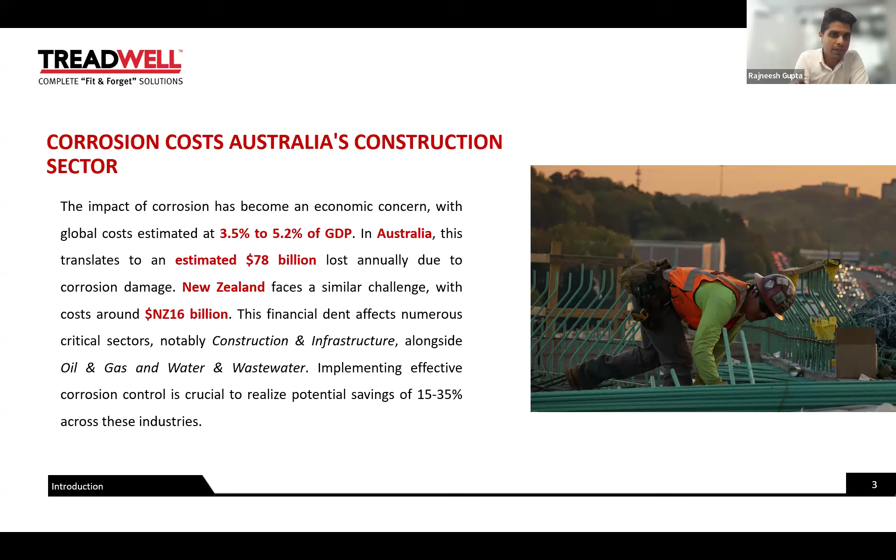Perhaps to give you a short introduction on how FRP rebars are made. They are made through a process called pultrusion. And in terms of the raw material, there are two typical raw materials, which is the reinforcement in form of glass rovings, which are helically wound, and the matrix is either an epoxy or a vinyl ester resin. These are helically wound and are impregnated into the resin of choice, depending on the application, and perhaps are heated to a curing temperature, after which they can be cut to length. This process is continuous and hence is suited for voluminous runs.

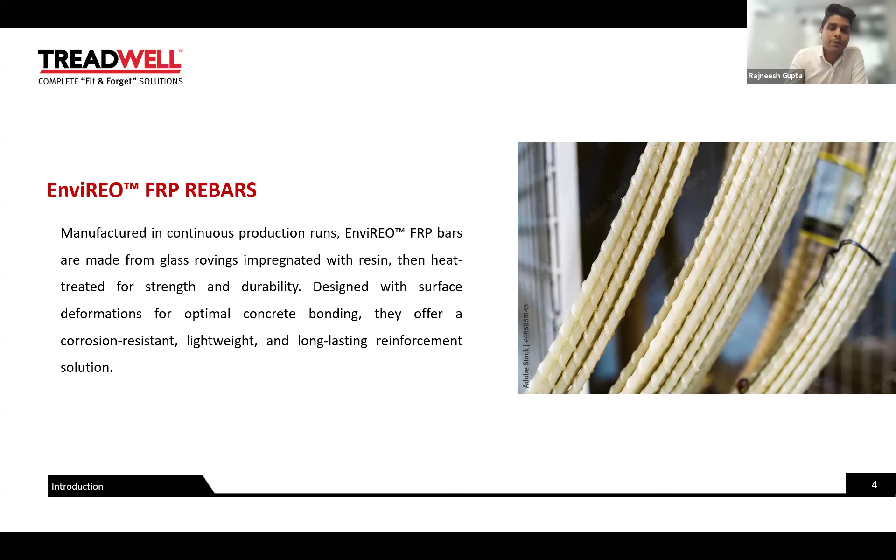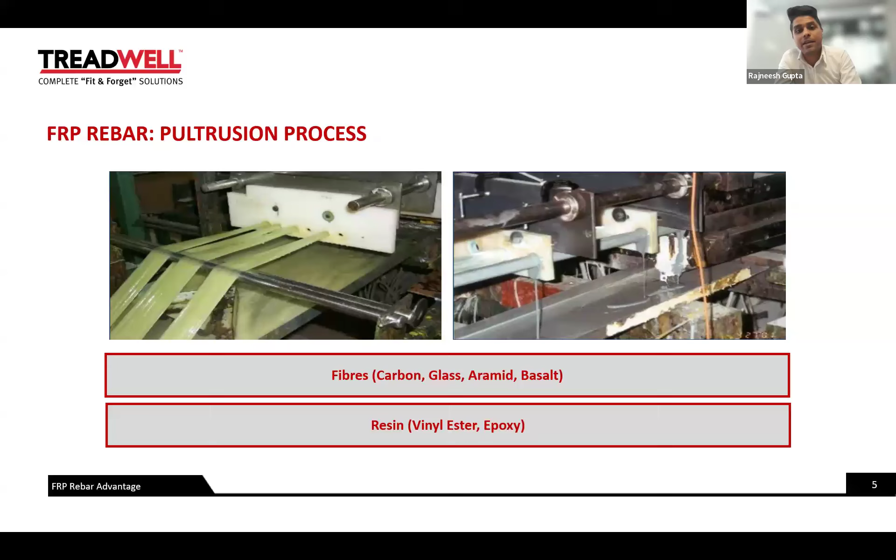And just to give you an update on different types of reinforcement that are possible through this process, we can use glass, we can use carbon, we can use aramid and basalt. And so are the resin choices, which are vinyl ester and epoxy. In specific to us currently, where we stand, we are only offering glass as the reinforcement, and most of our products are based using epoxy resins.

Now, some benefits of rebars: similar to other FRP products, they are non-corrosive, perhaps solve for harsher chemical environments where the conventional material have a lower design life and have to be cared for in terms of refurbishment costs. Perhaps have a longer design life, which is over 80 years. They have greater tensile strength, almost 3 times than the conventional steel, which is of the tune of 1000 MPa compared to 420 MPa for steel.

Nowadays, as we see with the global trends that we are becoming more and more sustainability conscious, perhaps both upstream and downstream, producing glass fiber reinforced rebars is less energy consuming. Hence, the carbon footprint is an estimated 35 to 45% less compared to the conventional choices of rebars that we have currently in steel.

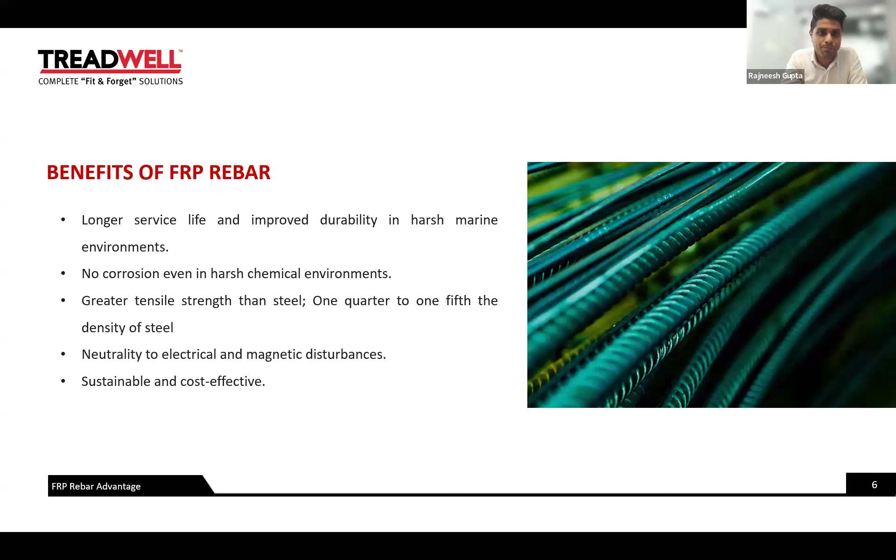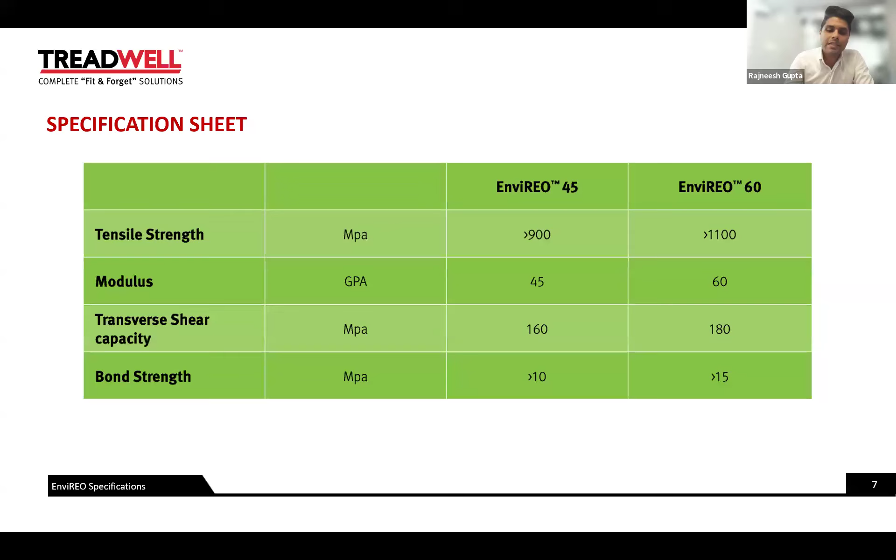In terms of a product offering of rebars, we are having two different variants of rebars. One is the base offering, which has a modulus of elasticity of 45 GPa and over. These rebars are used mainly for non-structural purposes. However, there is a premium offering which has a larger modulus, which is 60 GPa and over. These can be used for structural and load-bearing purposes.

A little more in terms of the advantages: as we were discussing earlier, the design life estimated by using these products is 80 to 100 years. Significantly low energy consumption, both upstream and downstream. There is no thermal bridging that is required. Because of the lightweight nature, the carbon footprint is lower in terms of logistics as well.

In some cases, depending on the application, one can also save the concrete cover, because since it does not corrode, we can avoid accounting for larger crack propagation by having reduction in the concrete. But again, there are certain variables to be considered. There are cases where off the shelf, if one is comparing the material price itself, there are certain sizes where FRP might tend to be slightly expensive compared to the conventional material.

However, when one compares the end-to-end cost, which is cost of the material, installation cost, logistic cost, it has been seen that overall project cost gives one a 25% to 30% saving in most of the cases.

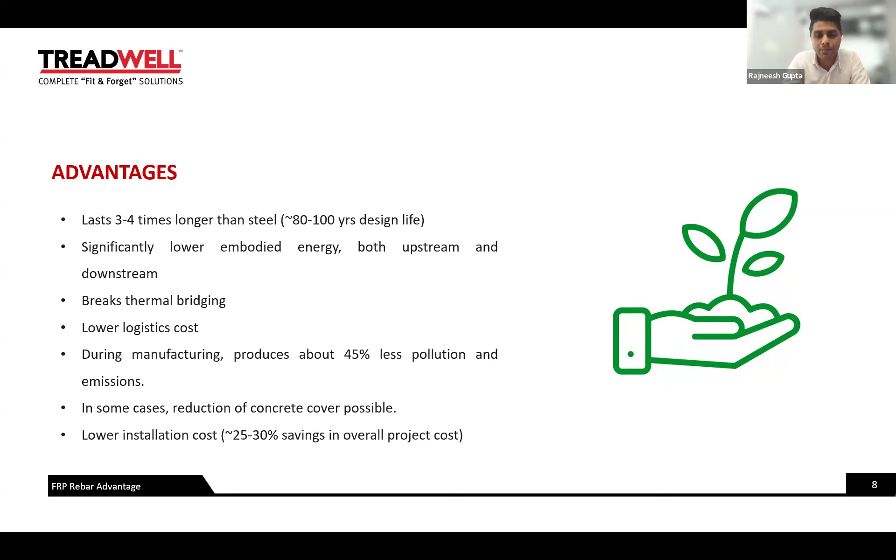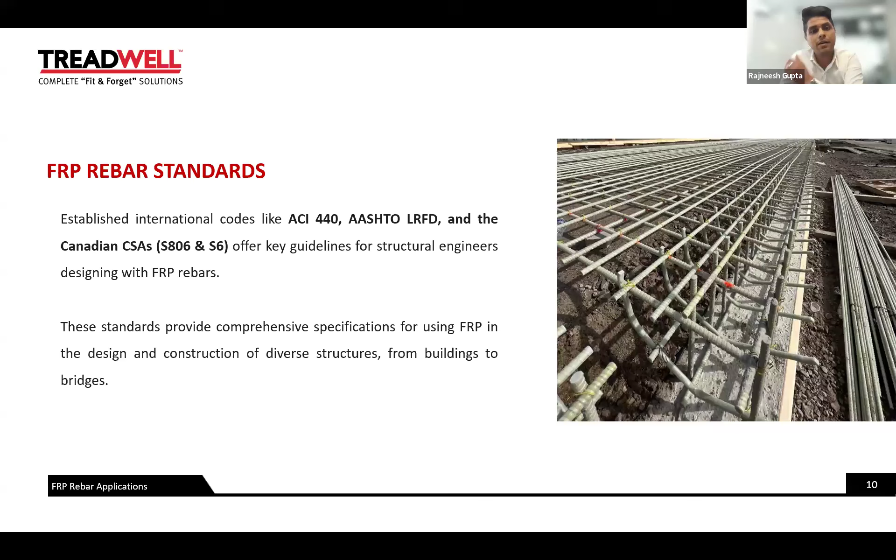Would like to touch base on certain FRP rebar standards. In Australia, currently, we do not have a design standard. However, there are established international codes such as ACI 440, AASHTO LRFD, and Canadian standards such as CSA S806, which offer key guidelines for structural engineers to design with FRP rebars. These can be used to design and construct structures ranging from buildings to bridges.

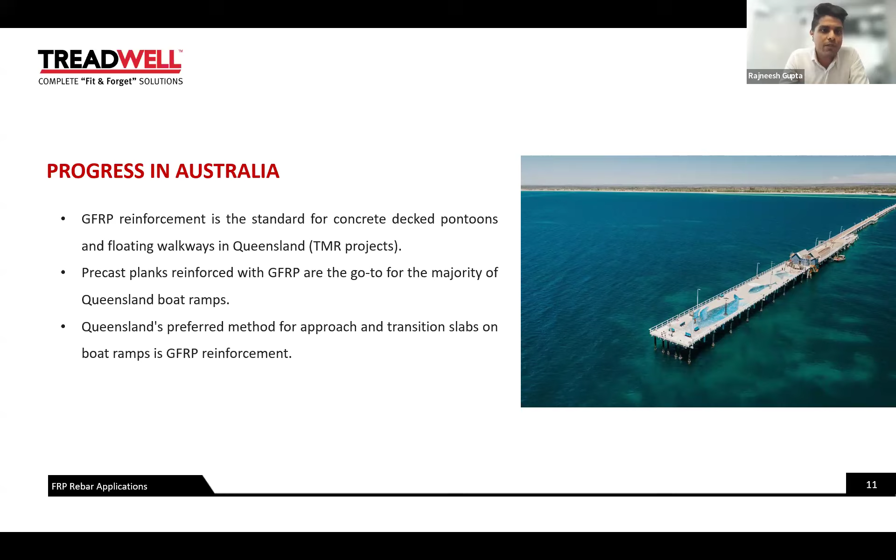In terms of progress, I think Queensland is leading the way with acceptability, where there are certain technical standards that have been coming out, such as AS 5204, where GFRP reinforcement has become a standard for concrete deck pontoons, floating walkways, planks, and transition slabs. There is a discussion on design standards that are probably expected to come out in future, but the timelines on it are slightly uncertain at this point in time. So the globally accepted standards are a go-to guide for most of the engineers currently.

Apart from AS 5204, we also have MRTS 271 and MRTS 301. These are technical and acceptability standards. They do not include the design aspect of things.

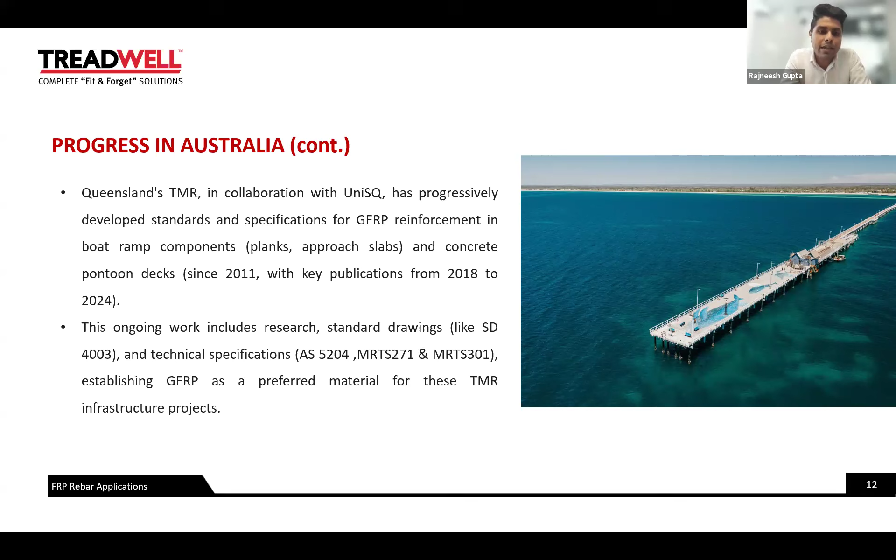In terms of the product availability or the offerings that we do, we have the standard stock lengths of structural and non-structural rebars, which have varied diameters ranging from 2 mm up to 51 mm. So size or diameter is never a problem. They can be used as rock bolts. And in terms of ancillary or accessory products, we also offer bends, stirrups, shear ligs, so on and so forth.

There is also a product offering that we are working on, which probably would be a replacement or an alternate for SL62 and SL82. The applications where these products can be used are bridges, tunnel segments, barrier walls, diaphragm walls, wharfs, substations, garages, pavements, fence systems, so on and so forth.

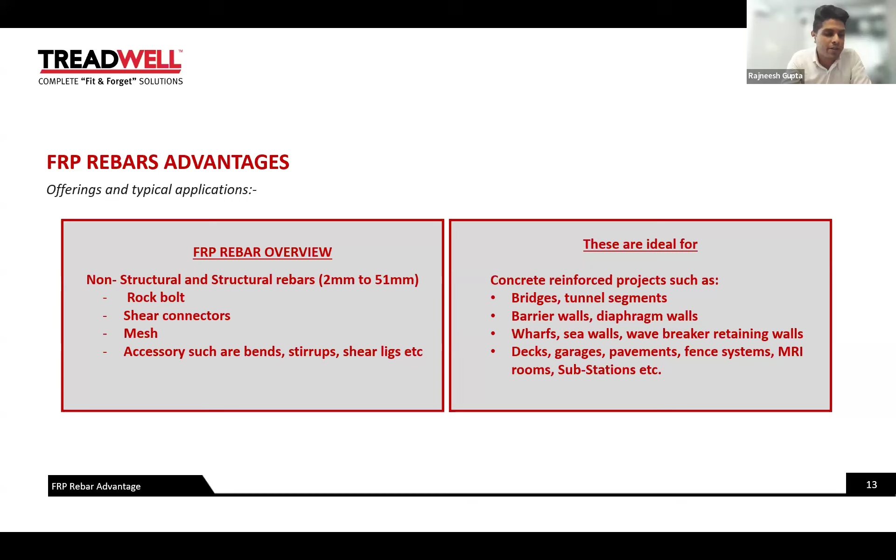Some case studies which probably would give you an insight on the acceptability of this product in Australia. This is fairly a new product, and in terms of acceptability, I would say it is still an uphill task right now. However, globally, because of the availability of design standards, they are much more widely accepted.

However, there have been a couple of marquee projects where these have been used, such as Point Wilson, Frankston Dandenong Road, Horn Island, and the West Gate Tunnel project. And very recently, these also have been specified in the South Australian Torrens to Darlington project.

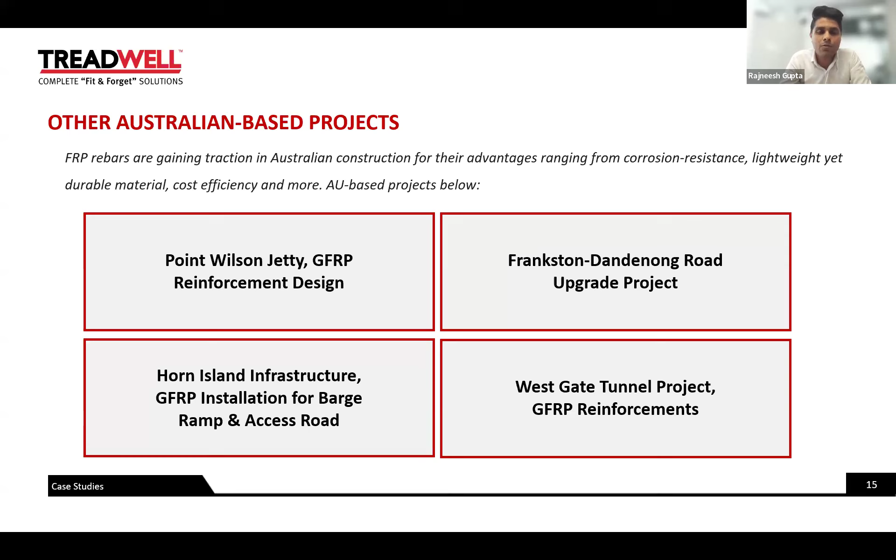Would like Tawfiq and Ahmed to touch base and talk about a couple of international projects where their products have been used. Ahmed, if very briefly you could, just introduce the application and talk a little bit. Hello again. Thank you, Rajneesh, for this opportunity to introduce and discuss our information about GFRP bars and their applications.

As we can see, one of the most beneficial and efficient applications of GFRP reinforcement is slab-on-grade construction. As we know, this type of reinforcement is mainly used for crack control due to shrinkage and temperature changes rather than for flexural strength. So we don't need reinforcement for flexural strength or any strength. We need the reinforcement only for crack behavior and the cracks due to shrinkage and temperature changes.

The high tensile strength and non-corrosive nature of GFRP bars make them an ideal solution for this type of application. We already used SFTec GFRP reinforcement in a 22,500 square foot factory in Quebec, Canada. Another crucial application of GFRP reinforced concrete is in bridge deck slabs. As we know, or if you need, I can explain this.

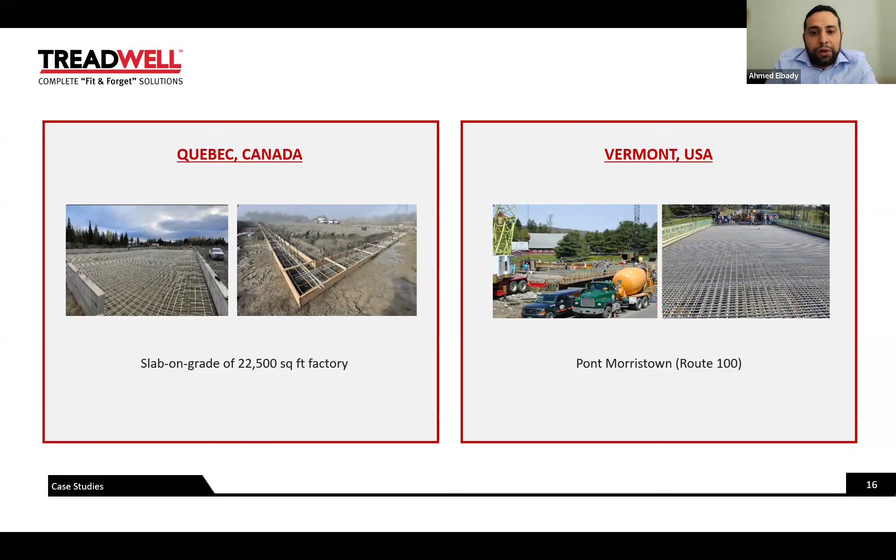GFRP reinforcement is also significantly integrated in pavement construction, because one of the solutions to preventing the corrosion of steel reinforcement and limiting concrete cracking in pavement is replacing the steel bars with GFRP bars. This project in Quebec presents a long-term field study on a busy highway in the city of Montreal, which is known to receive heavy snowfalls. The field test ran for 30 months, followed by visual inspections every 6 months and performance assessment, using number 5 GFRP bars.

Another application: we can consider GFRP bars the first choice in tunnels and infrastructure applications due to their superior durability and corrosion resistance. This characteristic makes them particularly suitable for harsh environmental conditions and the best choice to replace traditional steel reinforcement, in particular tunnel lining segments and soft eyes for tunnel boring machines. We can easily use GFRP bars for all of these infrastructure projects.

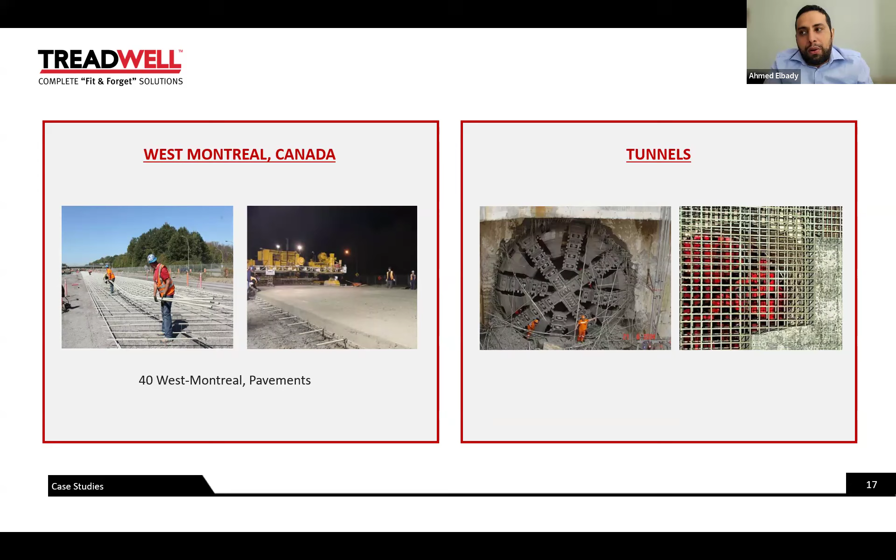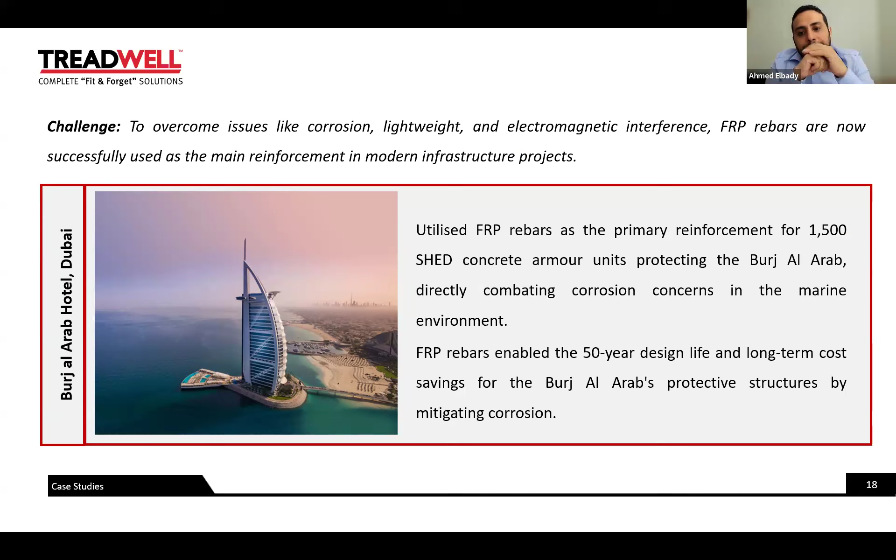Thank you, Ahmed. That was a good download and touch base on the use cases, and I think that would have given our audience a good insight on the product offering. I'll open the floor for any questions and we can answer them together. So, there's one question on the limitations of FRP: where it is usable and not usable. Would you like to take that?

For GFRP bars, first we need to talk about whether we use them for structural or non-structural elements. We can use GFRP bars for all non-structural elements, but for structural elements we need to take into consideration the stiffness of the GFRP bars when we design slabs or walls, because the main problem of GFRP bars is the stiffness compared to steel. But all GFRP codes and standards address this issue and provide design equations to check serviceability and strength requirements.

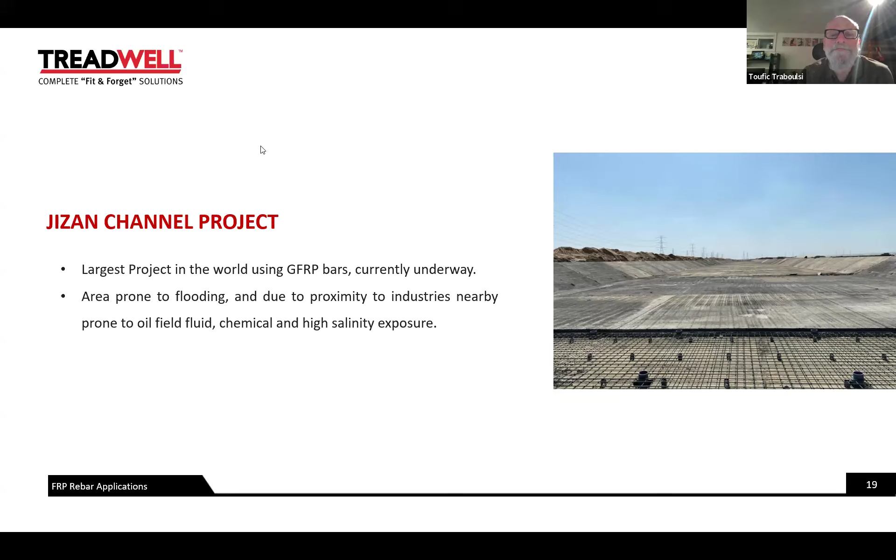Ahmed, one question that has come up, and it's an interesting one: how does the epoxy fixing into concrete for GRP compare to steel reinforcement? I need to add something on this point. As you presented, we have two types of resin, epoxy or vinyl ester. For structural applications, we use vinyl ester resin because all GFRP codes mention that vinyl ester is the most appropriate resin for structural applications. For non-structural applications, we can use epoxy or vinyl ester.

All of these resins, either epoxy or vinyl ester, are combined with fiber during the production of FRP bars. So once we have GFRP bars with a suitable surface, they can be like steel bars. You don't see any epoxy or resin because it's already combined with the fiber as one material in GFRP bars. Perfect.